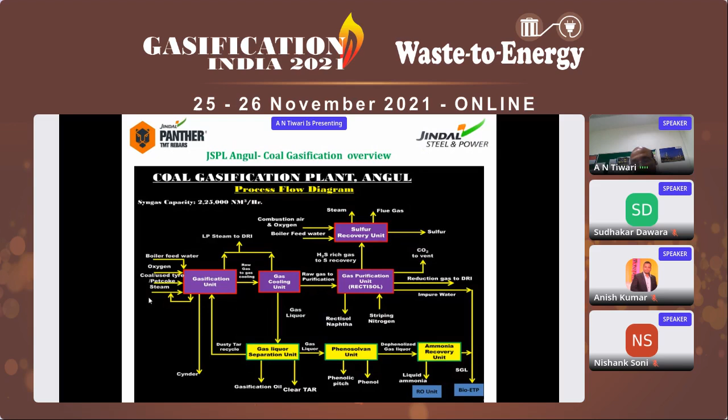The remaining liquid goes to ammonia recovery, where we recover the ammonia, and then it goes to water treatment. Then we have an RO unit, and the water is reused. So this is just a brief about JSPL.

Let us look at gasification for production of future fuels. Theoretically, yes, it's going to be the future fuel, but practically it is doubtful. There are a lot of difficulties, and the major one is the policy makers, because what they wish is different from their intentions, which are not clear.

This is my view. These views have nothing to do with JSPL. So I see the wish. If you see, for the last 10 years we have always been thinking of that.

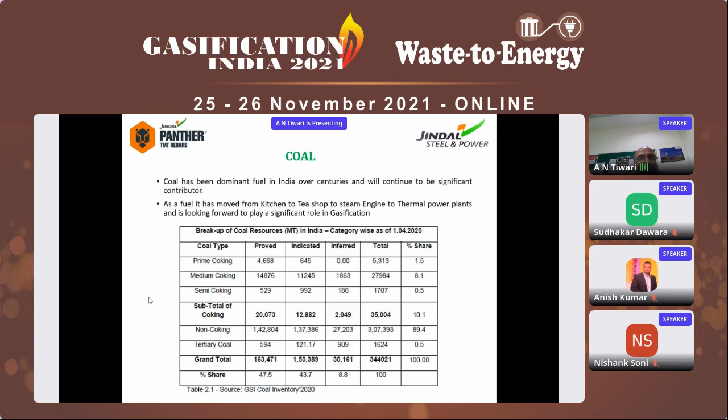The government is talking about 100 million tons of coal gasification by 2030. Whether that's possible or not is difficult to say, but they are also planning 1 billion tons of coal mining by Coal India. That means 900 million tons of coal will be used for other purposes, and the major share will again go to thermal power only. We are not going to stop thermal power, so coal will remain the major source of energy for India. Whether gasification will be there or not is a question mark because of the many challenges involved.

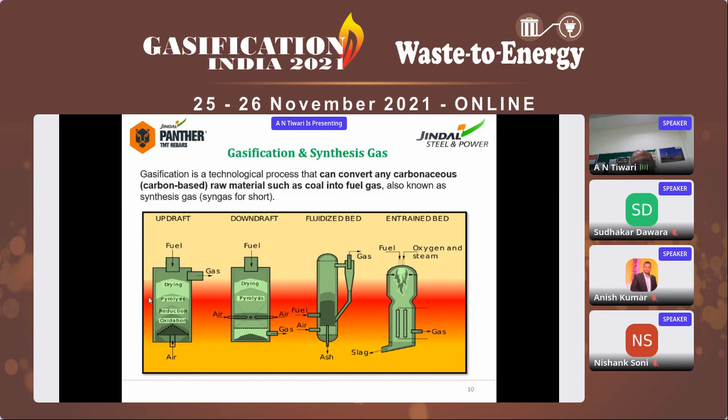For gasification technology, we have three major types of gasifiers: fixed bed, fluidized bed, and entrained bed. Gasification technologies are well established. It's not that they are very new - they have been operating for the last 7 to 8 decades. Still, there are issues for Indian coals.

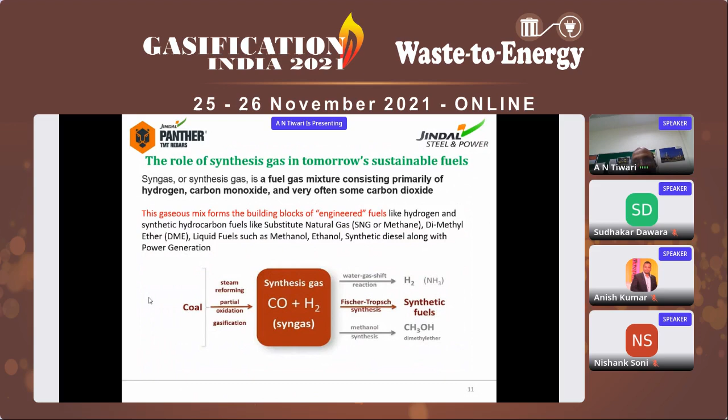If you go to synthesis gas, we are talking about the fuel. We can convert it into hydrogen, we can convert it into SNG, we can convert it into methanol, ethanol, DME - all sorts of fuels can be produced, all sorts of chemicals can be produced, once you convert coal into synthesis gas. So there is no doubt that you can generate all these things.

If you see the chain from the syngas, you can go to fuel, you can have combined cycle, you can run boilers, you can run turbines, you can do methanation, you can generate natural gas, you can generate hydrogen, convert it into ammonia, you can produce methanol. And methanol is the big talk today, so we'll go to methanol in the next slides.

Then you can go to Fischer-Tropsch, you can generate diesel and other fuels. Almost a decade back, Tata and JSPL had planned for coal to liquid. They had an MOU with Lurgi and Sasol. They had their mines, but on 25th August 2014, the Honorable Supreme Court gave a judgment to cancel the mines, and the mines were cancelled in September 2014.

Both JSPL and Tata have abandoned those projects. So now who will dare to come into that? That is a question mark again. We are starting the same talk again after a decade. So who will come for that? That is doubtful.

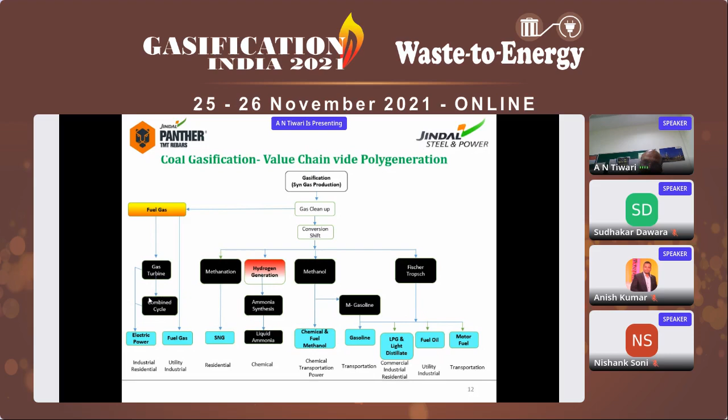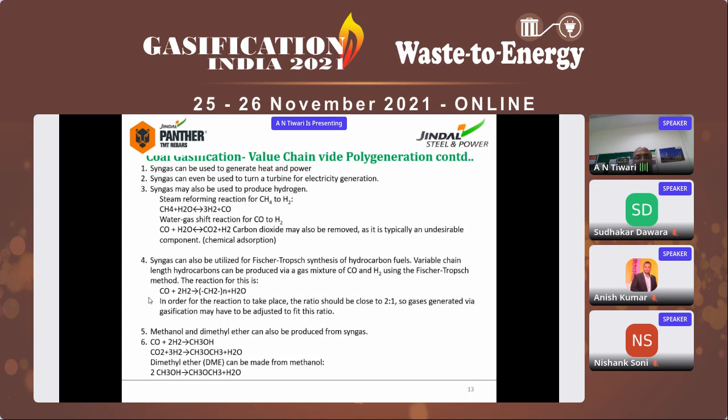Syngas can be used to generate heat and power - you can generate electricity in a turbine. You can use it for producing hydrogen only, through the water shift reaction, or also through Fischer-Tropsch. You can convert it into diesel and other fuels. You can go to methanol to olefins, and from olefins you can have any number of products. You can even produce ethanol through this route, but the challenge is the cost of all these routes compared to natural gas and other things today.

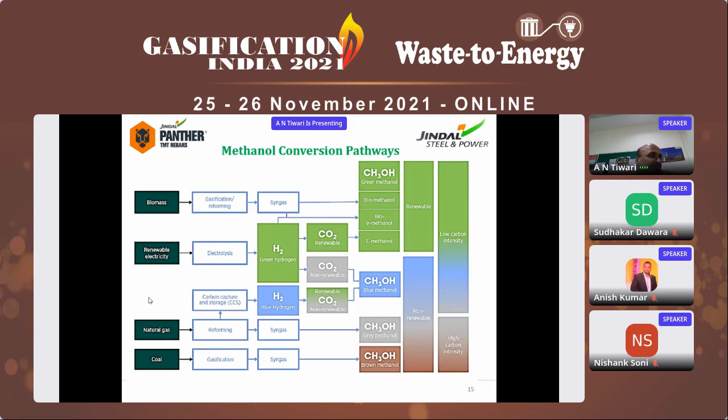Some papers say that by 2050 methanol will have 500 million ton production, but 250 million tons will be e-methanol, coming from green hydrogen in electrolysis and CO2 from renewable sources. So coal has a little role in that because everybody is trying to reduce the carbon emission. So carbon emission is a big challenge in front of coal.

Some of the challenges for India are availability and price of the coal. We are talking that we have abundant coal. We are the fourth in the world as far as coal is concerned, but quality-wise also we are the fourth. It's just like water - you have three-fourths of the water in the world, but you don't have water to drink. Similarly is the coal. We are sitting at the coal mines in Talcher.

We don't have coal for our gasification. We don't get coal in time. We don't have linkage. The coal prices - you go to the spot auction, you get almost 100% premium. So it becomes a challenge for coal gasification, whoever is coming. The availability and price of the coal will be a problem.

Even government is talking about mines - even if somebody gets a mine, it's not easy to operate the mines nowadays because it will take time. A lot of process is involved, like acquisition, rehabilitation of the people, all those clearances are a headache. They are going to take much more time, and then there's the cost of production of the coal.

The mines which will be allotted - as shown in the slide earlier, around 47% of the proven coal is there and same amount is indicated. Most of the mines being allotted are those rejected by Coal India. So that is being allotted to the people. In the last allotment, I think 5 years back, whatever mines were allotted, not a single mine has operated today. So that is the difficulty.

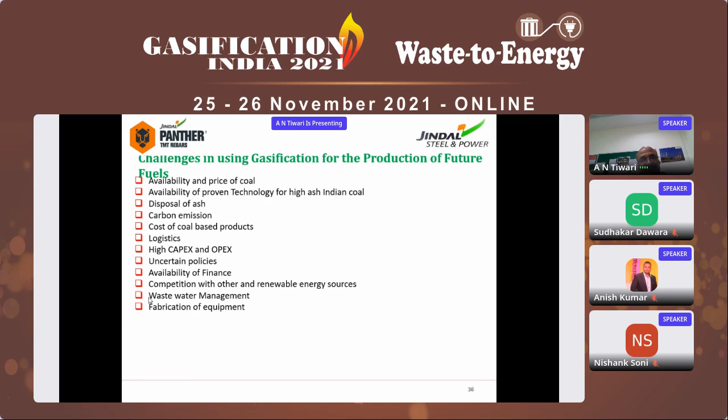So the same challenges here: the quality of coal, as I told, is very low rank coal. If you do the washing and other things, it's again a cost. If you don't do the washing, definitely there will be a problem.

Though many technology suppliers today say they can run at 45-47% ash, I am sure the moment ash goes beyond 30%, the reliability and availability of the equipment will drastically fall, and it's a challenge. Higher the ash, higher the energy consumption, higher the maintenance cost, and it will be a big challenge.

Availability of coal, as we have already discussed - Coal India, I think 2 days back, the chairman of Coal India was telling this is the time to increase the coal prices. They are in the business of that - why would they reduce the price? They are selling 100 ton but if they can earn the money for 200 ton, what interest do they have to reduce the price? And how will the government force them, because everybody is a profit center for government also. So that is a challenge.

Capital requirement we have already discussed. Major is the fuel where we are talking methanol and ethanol. Then we have to see how the vehicle engines will be designed. Up to 15%, 20% we can mix in the fuels, but if you want to run the vehicle 100% methanol and 100% ethanol, then vehicle engines have to be designed for that. And today when the world is moving for electrical vehicles, who will invest for the designing of these engines and how long will it be viable? So that is another challenge because we don't have the vehicles where you can use 100% methanol and ethanol. So that challenge will always be there.

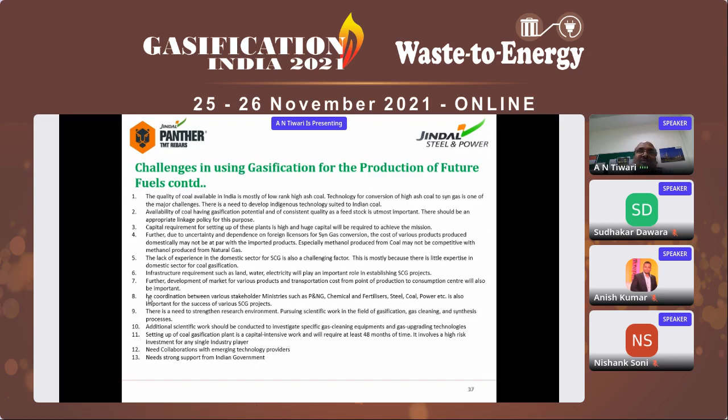And what is the remedy for that? It's not known. Thank you. So I think it was not very pleasant.

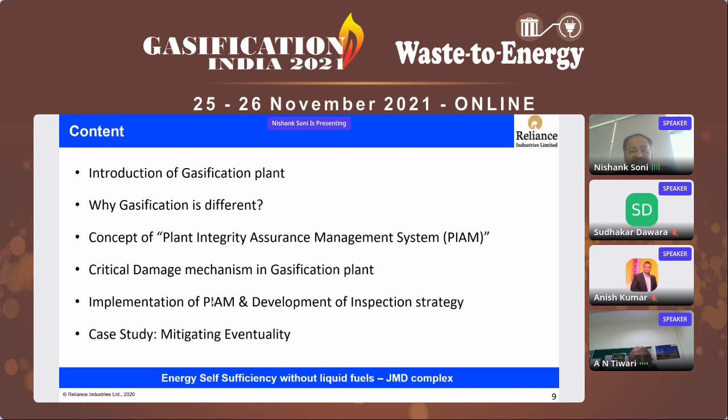As we all belong to a common fraternity, gasification is not unknown to anyone, but still, I would like to give a brief discussion about the gasification plant. In a gasification plant, we prepare a slurry by mixing a carbonaceous material, which can be coal or petcoke. It is mixed with limestone or any other catalyst to reduce the temperature, and mixed with water in the slurry preparation unit, so all the solid and liquid mass comes into a semi-liquid, semi-solid consistency. It is fed and partially burned in the gasification reactor. The oxygen for burning or partial combustion is fed from the ASU unit.

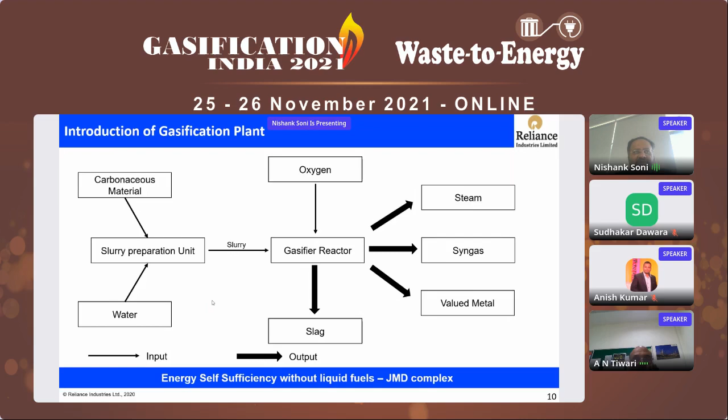The outcome of any gasification plant is HHP steam, which is used for heating and other purposes. Syngas, as we all know, has its own energy value and accordingly a commercial value. We also get hydrogen, other precious materials such as vanadium, and in addition, we can extract some carbon-based products which are used for other industries.

Moving to our next topic: why gasification plants are different, or why we face so many challenges in running gasification plants or maintaining the integrity of all the assets. In this and the coming slides, we have made an attempt to identify some of the basic differences from refinery and other petrochemical plants or complexes.

The first thing is characteristics of feed. In the case of refinery or any petrochemical plant, the feedstock being processed is either in liquid or gaseous form, whereas in the case of a gasification plant, it is semi-liquid. So there are certain damage mechanisms which get activated based on the phase of the feedstock. Secondly, in petcoke-based gasification plants, we are processing refinery residue.

Refinery residues are nothing but a combination of higher molecular weight chains which have to be broken. And in order to unlock business opportunities, many times a variety of crudes are processed, and accordingly the feed is inconsistent with respect to its quality, its carbon percentage, and other impurities. So feed characteristics form a distinction or demarcation point.

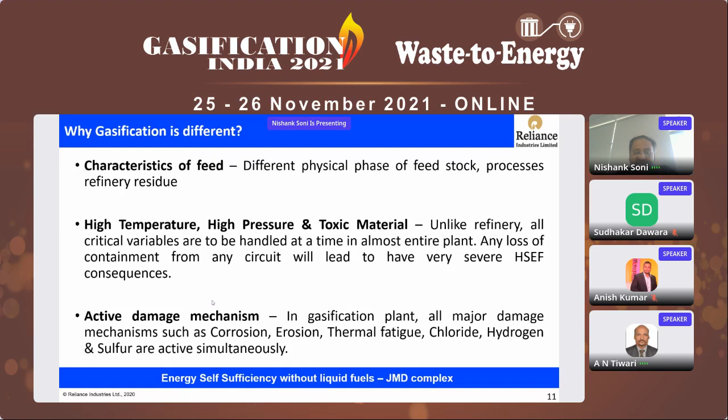Third point, the third demarcation is active damage mechanism. In the case of gasification, all major damage mechanisms such as corrosion, erosion, thermal fatigue, presence of chlorine, hydrogen and sulfur are active, and many times they interact with each other and form a novel kind of damage which has neither been studied nor forecasted. So the presence of active damage mechanisms makes gasification a very challenging and tricky plant to operate.

Apart from this, the unavailability of proven material is also a big concern. Typically, gasification reactions occur at temperatures approaching or higher than the lower critical temperature of any material. And as of today, there are very few materials available which can support or hold containment at this temperature. Then scarcity of technical know-how, behavior of material in harsh environments, and interaction of various damage mechanisms under prevailing conditions are very limited.

Because of this, it is difficult to define a consistent integrity operating window, which is usually seen in refinery or petrochemical plants - that is not possible here. So scarcity of technical know-how is also one of the biggest challenges any gasification plant faces today.

And the last and most important thing is the consequences of any failure will lead to containment loss, and syngas by nature is very toxic and also explosive, so it will have very severe socio-economic consequences. Considering all these parameters, the gasification plant is entirely different from any refinery or petrochemical plant, and accordingly the integrity management is very crucial.

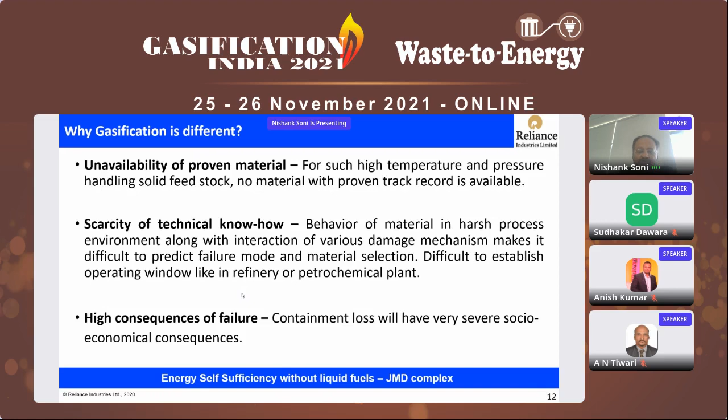In this slide, we are going to discuss the concept of plant integrity assurance management system, also known as PIAM. PIAM is nothing but a systematic approach for identifying potential damage mechanisms based on probability of failure and its consequences. PIAM also provides the inspection method, its monitoring location, inspection frequency, and the extent to which inspection is to be done. The first stage of devising any PIAM is to identify a corrosion loop.

Anyone will have a doubt - what is a corrosion loop? The corrosion loop is nothing but a portion of the plant's feed circuit wherein all the piping and connecting equipment are scrutinized based on similarity in process conditions such as processing environment, temperature, pressure, based on active damage mechanism, and sometimes based on metallurgy.

So the entire plant is broken into each corrosion loop. Then each corrosion loop is analyzed with respect to the active damage mechanism within it. Secondly, it is identified and weighted based on probability of failure, and ranked with respect to consequence of failure.

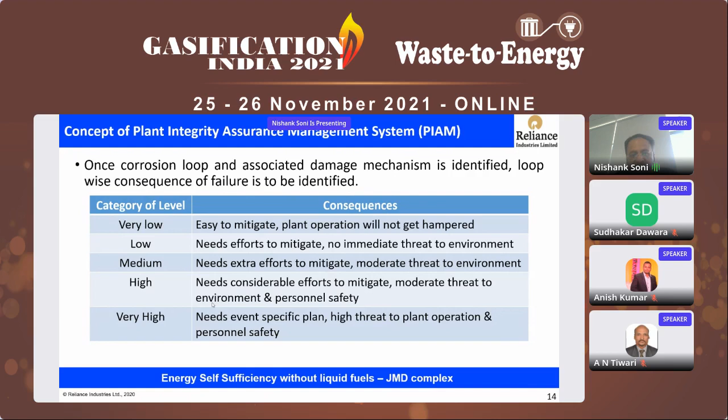Each identified corrosion loop has been assigned a particular category level, and it has been assigned a probability of failure based on past events, past experience, inspection observations, and predicted failure rate.

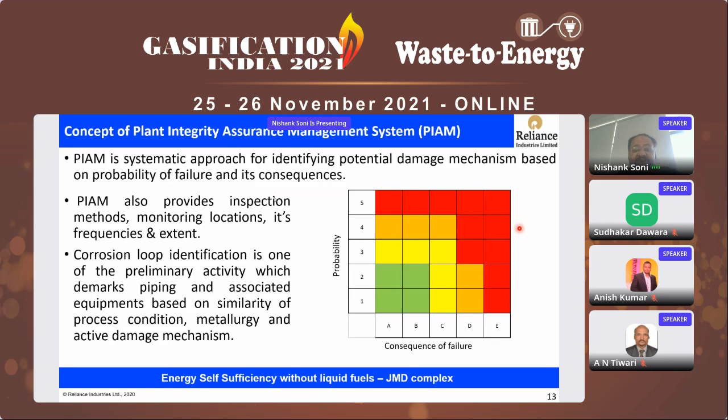Based on this, each corrosion loop has been assigned a particular severity rating, and based on the severity rating, each corrosion loop has been provided with a particular inspection plan and inspection frequency.

In this slide, we will discuss what parameters are to be considered while deciding the inspection frequency. There are many different parameters to be considered; some of them are listed here.

First of all, operating condition. If the person devising the PIAM feels that the operating condition is very harsh, then inspection frequency may be increased or reduced accordingly.

Then the physiochemical characteristics of the process stream and operating environment matter. Many times, based on process licensor recommendation or manufacturer's recommendation, the frequency is decided. Sometimes statutory requirements make it mandatory to have a stringent inspection frequency, and so on.

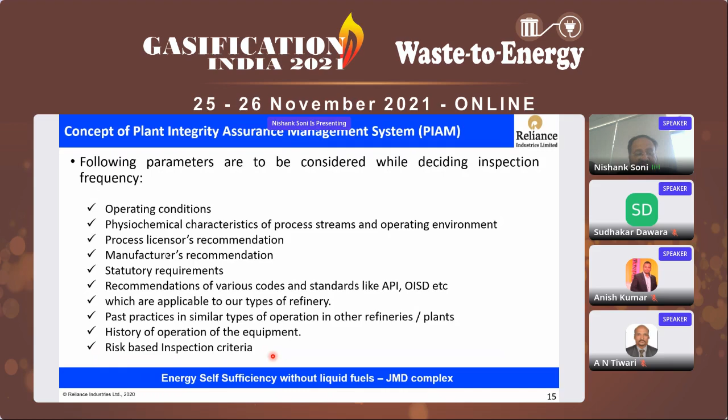Here I would like to accentuate one particular thing, the risk-based inspection criteria. Risk-based inspection is one of the novel or recently evolved approaches in maintaining plant integrity. Risk-based design is also a very important concept, and many times inspection frequency is identified based on risk-based inspection criteria.

Once the PIAM has been structured, we identify each corrosion loop. Then we assign a consequence analysis and severity matrix to rank each corrosion loop by severity. Now we will go into the implementation phase of any PIAM.

Before implementing PIAM, the first and foremost thing we need to do is identify the baseline thickness mapping on each identified loop, piping and its component, and store it for future reference. This serves as a basis to anticipate or predict corrosion rate and severity of anticipated damage.

Second, we need to establish a robust system for online monitoring. This can be done through instrumentation intervention, by providing a temperature gauge, pressure gauge, or thickness check. The outcome of this online or periodic monitoring is observed at periodic intervals.

Based on the observation, immediate examination intervention may be suggested. For example, at a particular location, if any instrument reads a higher temperature, then high temperature thermography may be suggested.

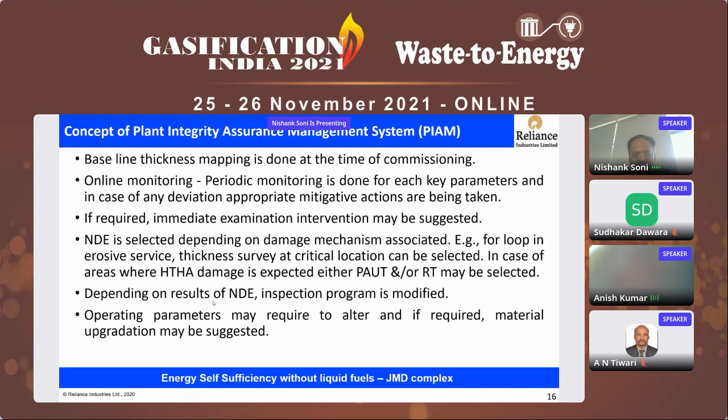Thanks, Nishank. Hope I am audible. Yes, Anish. Yeah, okay. Thanks, Nishank. Now taking this forward into the slides.

Following are the few main loops which we'll discuss now. The first one is the slurry loop. This loop includes all equipment, storage tanks, and piping used in mixing different elements together to prepare semi-solid slurry and transfer that slurry into the reactor.

In the reactor loop, containing the main reactor, all the exothermic reaction takes place to produce syngas and other gases as well. This is the area where temperature and pressure are very high, which makes this very different from other critical loops.

That third corrosion loop is the syngas loop. This loop contains the immediate downstream of the gasifier reactor up to the steam generator, and hot syngas entering this loop cools significantly, and minute solid particles present in the syngas get filtered as it flows through sintered metal fibers.

The last one is the slag loop. This loop contains piping and some special equipment carrying slag from the reactor bottom to tanks and other slag handling equipment. Subsequently, downstream, carbon recovery equipment is also installed, which recovers carbon through a physical separation process and recycles it back to the gasifier reactor through slurry preparation.

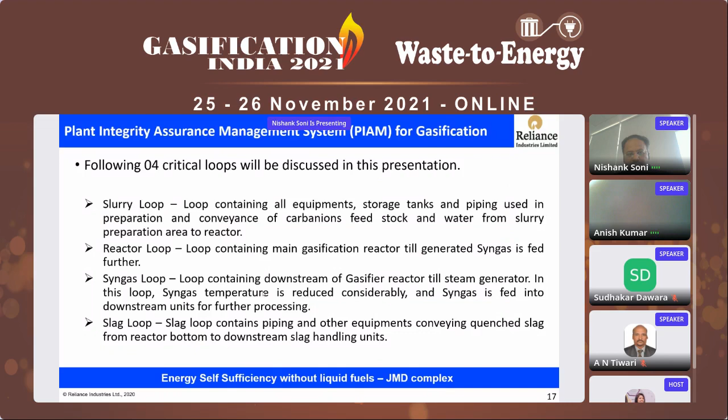Moving to the next slide, we will discuss the critical damage mechanisms in the gasifier plant. As per the respective service condition and methodology used, a loop-wise specific damage mechanism is identified here against each corrosion loop.

For the slurry loop, due to the presence of solid particles in the semi-liquid slurry and the further high velocity of the slurry, this leads to erosion damage. Other chemically active elements like sulfur also change to sulfide, leading to further degradation. This may cause significant erosion as well as wet H2S corrosion.

The next one is the reactor loop. In this loop, complete hot gas paths are made up of alloy steel with internal refractory lining for erosion and temperature resistance. Any damage like erosion, HTHA, or sulfidation will occur only if the internal refractory and protective internal coating gets damaged. Moving to the next loop, the syngas loop.

Since this syngas is cooled significantly and solid particles are sieved away, except for erosion, all the other remaining damage mechanisms will be the same as the reactor loop, and they will also remain active in the piping and equipment of this particular loop.

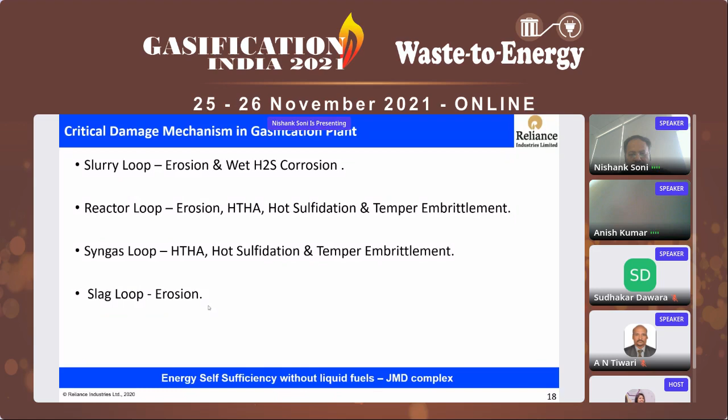For the slag loop, since it contains water with solid slag particles, erosion will be the only active damage mechanism.

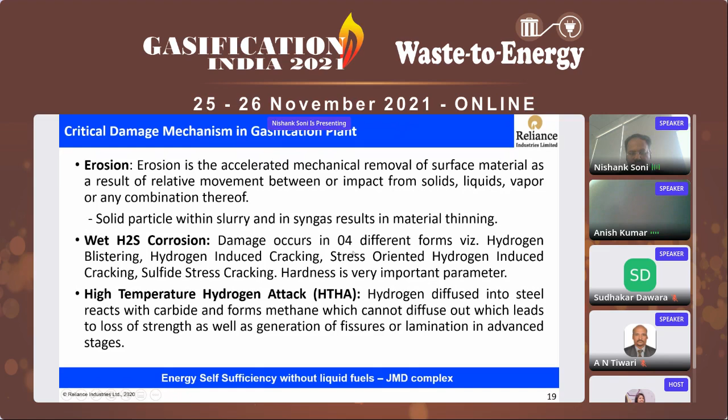Moving next, in this slide we will briefly discuss each of these damage mechanisms. The first one is erosion. Erosion is nothing but mechanical removal of surface material as a result of movement of a process fluid, which may be in the form of solid, liquid, or vapor, or a combination of all those.

The second one is H2S corrosion. In this case, damage occurs in four different forms, which are hydrogen blistering, hydrogen induced cracking, stress-oriented hydrogen-induced cracking, and sulfide stress cracking. These damages are all related to the hardness of that particular material, and the hardness value is very important with respect to the occurrence of these damage mechanisms.

The third one is HTHA, known as high temperature hydrogen attack. In this case, hydrogen diffuses into the steel and reacts with carbide to form CH4, which ultimately cannot diffuse out, leading to loss of strength, and as well as generation of lamination at advanced stages.

The next one is sulfidation. It is nothing but formation and continuous removal of iron sulfide film, leading to gradual thinning of the component, ultimately leading to catastrophic failure.

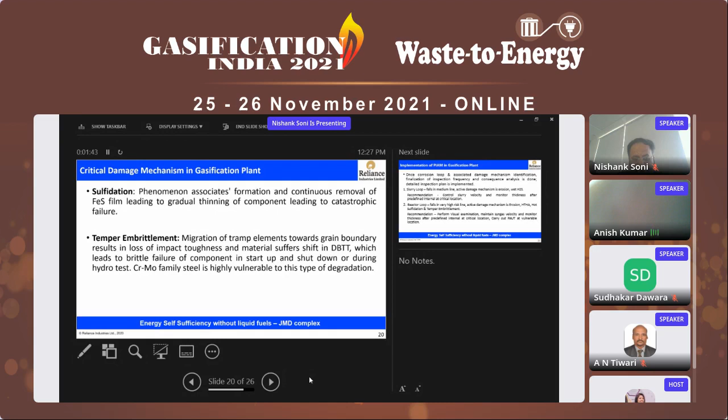The next one is temper embrittlement. This is a migration of TRAMP elements towards grain boundaries at the microstructure level, which ultimately results in loss of impact toughness, and materials suffer a shift from ductile to brittle transition, which ultimately leads to brittle fracture. This only happens during startup or shutdown of any system. Chromium and moly family steel is highly prone to this type of degradation.

In this slide, we will discuss the implementation of PIAM in the gasification plant. So, till now we have discussed the corrosion loop, active damage mechanism, and finalized inspection frequency based on consequence analysis. Our detailed inspection plan is ready to be implemented, and we will discuss it now.

The first one is the slurry loop. This lies under a medium risk loop because any leakage or damage leads to only plant upset, and it can be repaired or restored only by blinding any equipment in this loop.

The second loop is the reactor loop. This loop lies under very high risk because it will have severe health and environmental consequences if there is a loss of containment, and the recommendation will be visual inspection and maintaining syngas velocity within limit. Monitoring thickness after a defined interval at strategic locations will also be good for this loop. Carrying out PAUT in this loop will also be very significant, as it can capture any subsurface defects.

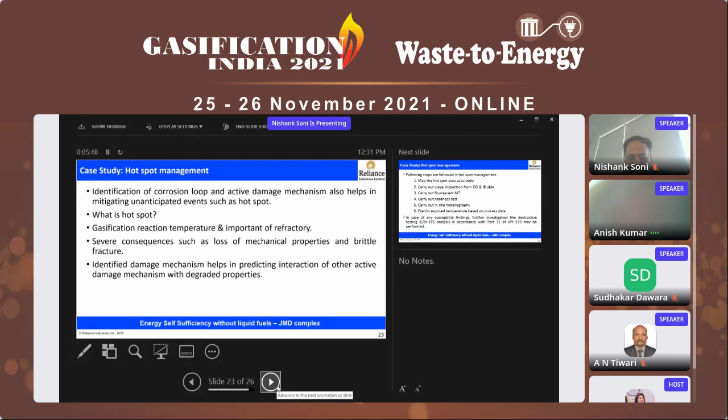Moving to the next slide, we will discuss the steps needed to manage a hotspot. After taking a safe shutdown, we have to map the hotspot area very accurately and carry out visual inspection from either side - from the ID side and from the OD side also - to check for any bulging or deformation in the metal surface.

After that, we will carry out fluorescent MPT, which is a very ideal NDT to examine any surface crack propagation. And after that, we'll do a hardness test, which is also an ideal NDT process to check any changes or degradation in the mechanical properties of that exposed part.

The fifth one is in-situ metallography. It is a tool to check if there are any changes in the microstructure of that specific element, which ultimately leads to a more degraded part. In case of any susceptible findings, further investigation like destructive testing or fit-for-service analysis will be carried out in accordance with Part 11 of API 579.

Now, with this, we have come to the conclusion of today's discussion. PIM is a collective effort from the inspection and operation teams, because for identifying prevailing damage mechanisms, input from the operation team is very, very important.

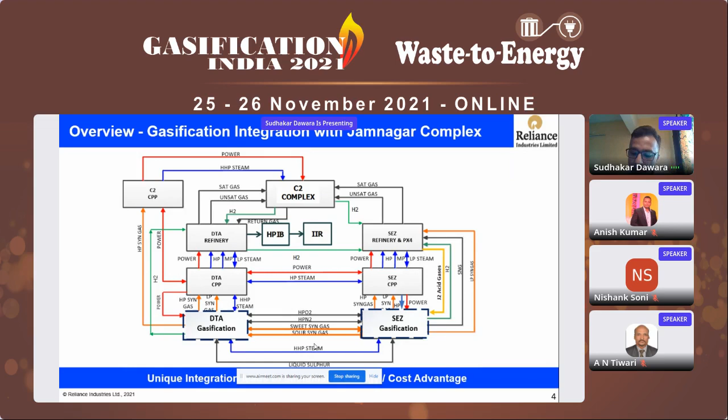You must have seen that during the second COVID wave, from these ASUs we supplied more than 1,000 tons per day of liquid oxygen when the country needed that liquid oxygen supply from us.

Then we have the OGBL units—outside gasification battery limits. Here we process this gas and make three products: we make hydrogen, and we are proud that currently the entire hydrogen supply is from the Petcoke gasification unit, with no SMR-based hydrogen running in the refinery. We have shut down all the SMR plants, and we have syngas for fuel and power applications.

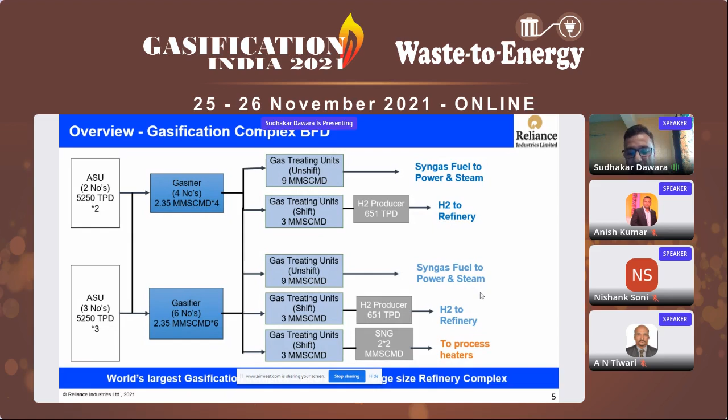I will talk about this in my coming slides—what are the plans, as I told in the beginning, for capturing these CO molecules. Once we have these CO molecules in terms of carbon, how do we convert that into chemical applications.

I would like to stress upon this E-gas plant. We had a similar E-gas plant in China with a company called Sinopec, and we are proud that based on our experience, we did not care about intellectual property rights—we advised them and gave them the technical know-how. Now they are running their plant with a 60% petcoke and coal blend, because their plant was designed for 100% coal and they were not able to stabilize it. We had a technical exchange program with them, and they finally got their gasifier running with 60% petcoke and 40% coal, and we feel very proud of that.

One more piece of information: this plant was designed based on a licensor, and the licensor has changed multiple times. Initially when we signed the contract it was ConocoPhillips, then it became Phillips 66, then CB&I, then McDermott, and now it's called Lummus. This plant technology was also used in Wabash in Indiana, USA, but that plant was shut down in 2016, mothballed, and now they are restarting it again.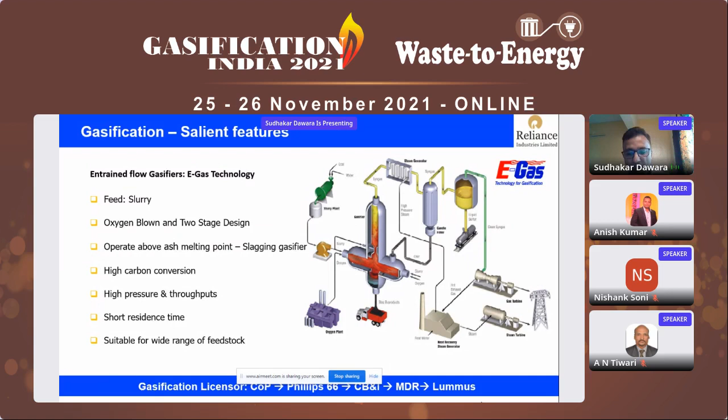We achieved this by January '20. I don't think there's an example anywhere in the world where a slurry gasifier has operated more than 100 days on a continuous run, but we have many more than 10 runs where we've run over 100 days. Of course, we have optimized to get the best out of the gasifiers, optimizing the run length to minimize downtime. We are proud to have achieved this 100-day run length in many gasifiers.

As Mr. Tiwari mentioned, this journey isn't easy, and like everyone in gasification plants, we've faced a lot of challenges. Starting from the beginning, we had challenges with feed flux management, and we had challenges controlling the slurry quality.

We had issues with slurry storage. Calling it a 'slurry' is actually a misnomer - it's not really a slurry. It's a 60 to 65% concentration, almost like a paste, with viscosity values in the range of 100 to 1000 cp. So basically it's a paste, and we have to push it through.

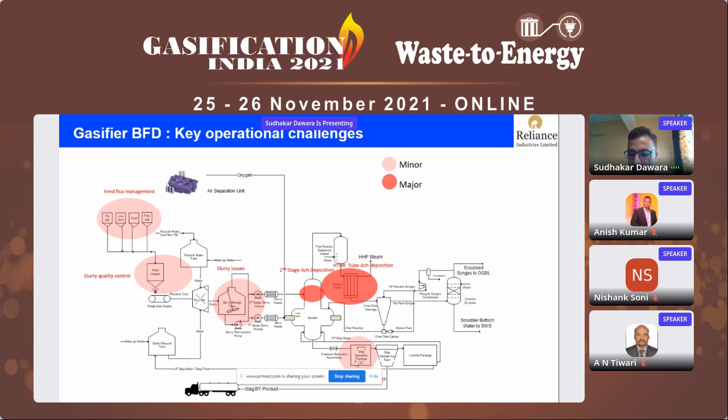A lot of carbon was getting into that stream. We've sorted this out based on optimizing the gasification temperature and other parameters. So let me give you a little more detail on this.

As I mentioned, we have two first stage mixers and two second stage mixers. If we look from this point at the top, this is the second stage. Here on the left side, you can see pictures of the kind of deposition we get in this hot gas path. These first two pictures show good operation.

After 65, 70, 100 days of operation, if we see this kind of deposition, we're happy. But sometimes if operation isn't correct - if we have issues managing the feed flux or flow dynamics - we sometimes get complete blockage of the second stage. You can see in the lower picture, almost 100% of the cross-sectional area is blocked.

On the right side picture, that's my syngas cooler. You can see a lot of deposition happens in these cooler tubes because we're dealing with ash particles. Once deposition happens, then whatever flow - the syngas with solids coming through this hot gas path entering the syngas - if it's going straight into the tubes, we don't have any problem.

But after this deposition, the flow is not straight. It's hitting at any angle possible into these tubes, and that erodes the tubes. So this is our big concern.

Here, like all my colleagues, Nishank and everybody is busy on this inspection, because we have 10 gasifiers. All the time, some gasifier is shut down, and a lot of inspection and repair is required. So this maintenance team is, I would say, an excellent team what we have at Jamnagar.

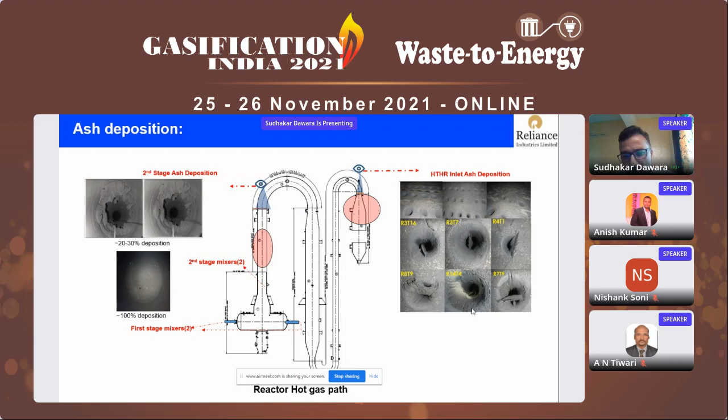So what all have we done? We have done this in the last 2.5 years. I would say that for any engineering background guy, gasification operation and working in gasification is a paradise for learning.

We moved away from petcoke, limestone, and fly ash operations to petcoke, limestone, and coal operations for better reliability and operability. Then to optimize our mill operations, we have gone for installing the pre-crusher, so that I have good control over my feed size.

We had little issues of availability and reliability in the storage tank and the rod mills. It was not there by design, so what we have done is completely interlink all these sections. We have also taken a lot of additives, so that I have a very stable slurry.

Then there are a lot of modifications done in the rod mill in terms of my throughput, in terms of my rod distribution, in terms of my rod weight. A lot of optimization done on the rod mill side.

We have optimized our gasifier temperature, so that I have good refractory life and good carbon conversion. So all this is very critical. And the outlet gasifier second stage outlet temperature, and then downstream how to control the temperature, so that my ash behavior is not in a sticky range - that also is a very critical thing.

It took some time, but now we understand in a much better way and we hold good expertise on that. As I told you, we have worked extensively on char filters, and we have developed many vendors, and now we have multiple choices. Now we can have good filter life.

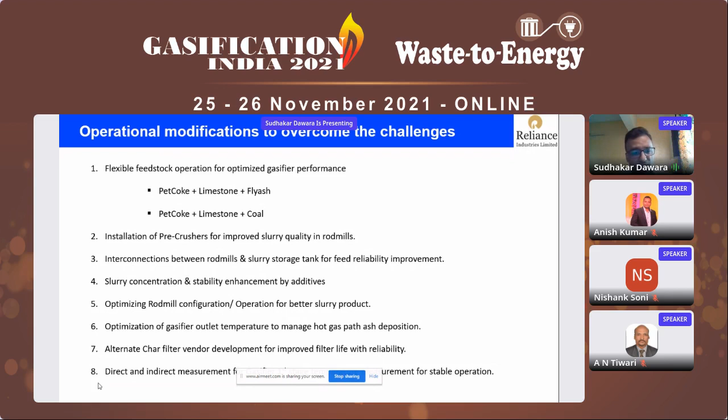Then we have a heat balance, and based on that we have done the temperature measurement. And how did we complete all these activities? As Mr. Tiwari was also mentioning, it's not easy - only Reliance can handle all kinds of expertise from the world.

Definitely, we went to each and every nook and corner of the world where gasification expertise resides. In terms of engineering companies, we had taken consulting from Fluor, Bechtel, Hualu from China. As he said, China is the hub for gasification - hundreds of gasifiers running on coal gasification. So we have definitely taken help from China.

We have gone to many universities for fundamental understanding of inorganic behavior, because we didn't have this inorganic expertise into our manufacturing domain. So we have built these capabilities. We have good relations with Penn State University in the US, CanmetENERGY in Canada, and IEC. You must have heard one presentation from IEC, Professor Meyer, yesterday - we had a very good relation with them.

Then, subject matter experts - we are very comfortable with all the simulation software, whether it's ProSim or Aspen. But for this inorganic chemistry, this was new software for us, and we have built reasonably good expertise with the help of Dr. Johan Van Dyk from South Africa.

Then we have other consultants - you must have heard the name of Dr. Chris Higman. Thierry Darde was the consultant for char filter handling. Then we went ahead and had very good interaction with the Linde gasification team, the Air Products team, and whatever suggestions we could get, we tried to stabilize and improve our gasification operations, of course with the help of the equipment supplier.

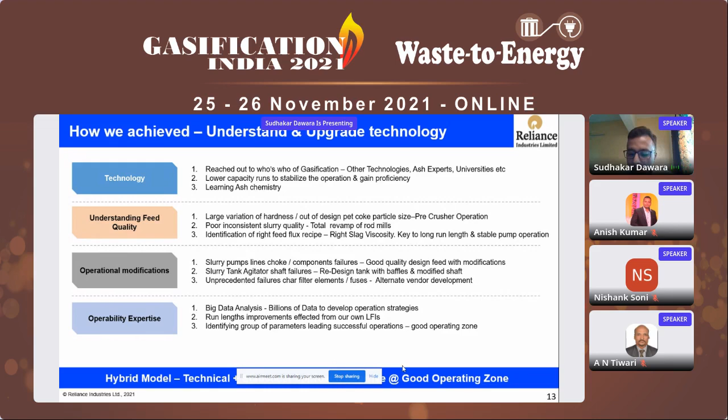Now, everybody is talking about this, and even our honorable chairman has announced a target of net carbon zero by 2035, well ahead of India's target of 2070. So the entire team is working in this direction.

We are working on the forefront of CO2 capture and sequestration, converting CO2 into value-added chemicals, and converting syngas to chemicals. Another step we're taking in a big way is how we can use biomass in current gasification. We're going ahead with taking biomass, torrefying it, and adding it, maybe starting with 5%, going up to 20% blending with petcoke, so that we can use this as green energy.

As I told you, back in our chemical engineering days, we learned from chemical technology that once you have syngas—CO and hydrogen—this is basically the building block for any chemical industry. Once you have those CO molecules, then you have hydrogen, either from petcoke gasification or electrolyzers for green hydrogen. Once you have the combination of CO and hydrogen, you can mix them in any ratio and create a complete set of product profiles for your organization.

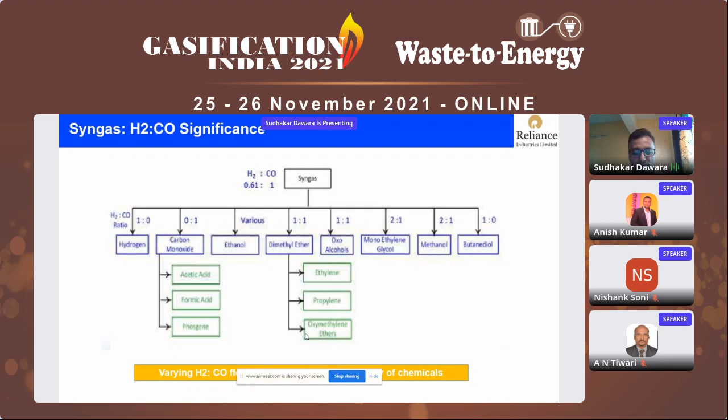Trust me, we are evaluating all the options for what we can use this syngas for in chemicals. Maybe in the next few years, you will hear a lot about what chemicals we are producing from this syngas-to-chemicals process.

In the same direction, you must have heard about the announcement—we are acquiring the desired skill sets, including REC Solar Holding companies, and some companies in the electrolyzer space, so that we can build these capabilities and go ahead with our green energy initiative.